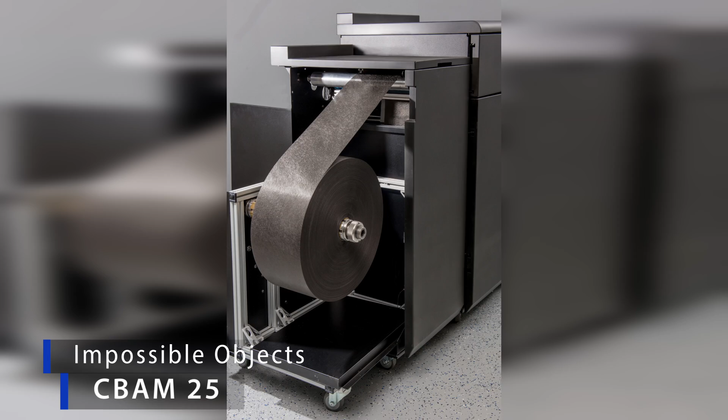Starting with the new composite solution from Impossible Objects. It launched its new CBAM 25 at RAPID TCT, which is an extension of its solutions for composite-based additive manufacturing. Its offerings produce parts manufactured with layers of composite material and polymer in powder form. At the launch, the company stated that CBAM 25 is 15 times faster, not than its predecessor, not than other composite machines, but than all machines in its class. The 25 in the product name stands for 25 feet per minute. That's 25 feet per minute of composite material, 18 inches wide, passing through the machine.

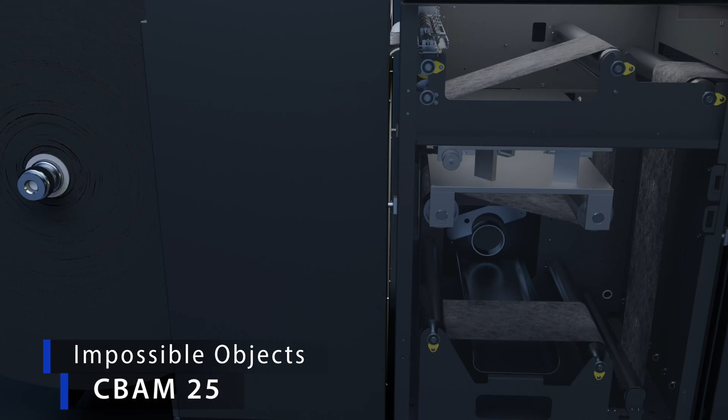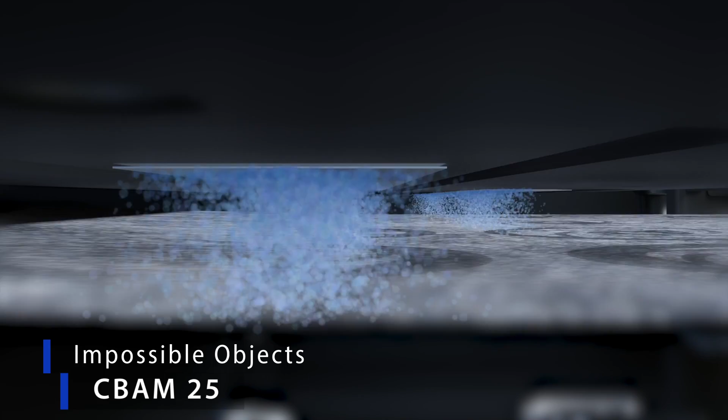That translates to roughly 1 vertical inch in 26 minutes, leading the company to claim that CBAM 25 is the world's fastest 3D printer. How does it achieve that, you might ask? Well, it's using technology developed for high-speed 2D printing, and 2 key elements of that are: it's web fed, a roll of composite material feeds through the machine, and it's also using piezo jetting that's completed in a single pass. CBAM 25 is all about achieving production-oriented throughput, but it has other advantages such as no limit to packing density and room temperature printing, which removes the physics from the processing equation. They're targeting a commercial release in the first half of 2024, but if you're interested today, Impossible Objects is now selling parts.

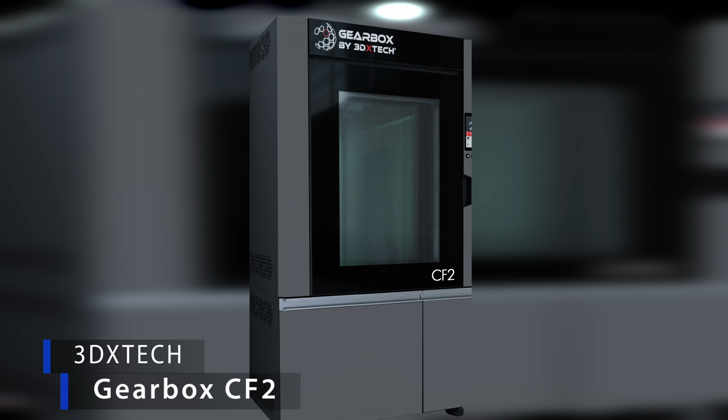Another composite solution came from 3DXTech. It launched its new machine, Gearbox CF2, where the CF stands for carbon fiber. But I was surprised because I walked in thinking this was going to be a more expensive solution. And in actuality, it's their more affordable solution when compared to its high-temperature machine, the Gearbox HT2. It's a 30% price reduction. Gearbox CF2 is a material extrusion or fused filament fabrication machine that runs carbon-filled and glass-filled nylon, as well as many of the company's engineering-grade materials.

It's fully open material-wise, so it can run 3DXTech materials or those from third parties, and it provides access to profiles and archival of those profiles once you've developed the parameter set. It has onboard storage for 8 kilograms of material in a desiccated chamber, and if in the future you want to run high temperature materials, this machine is field upgradable to become a Gearbox HT2. The company is now shipping with only a 2 to 3 week lead time. Now, on to photopolymer solutions.

And I'll start with Nano Dimension, which is known for 3D printed electronics and 3D printed microparts. In the latter category, it announced Fabrica Giga 25VX and Giga 250VX. Both of these machines offer 5 micron layers. The difference between them is the XY resolution and build area. The Giga 25VX offers 8 micron resolution with a 12 by 19 millimeter build area, where the 250VX offers 2 micron resolution with a 6 by 9 millimeter build area.

And like their big brother, the Terra line, which has an even larger build area and higher Z resolution, the Giga line uses a DLP light engine. Currently, the Giga printers are in beta testing.

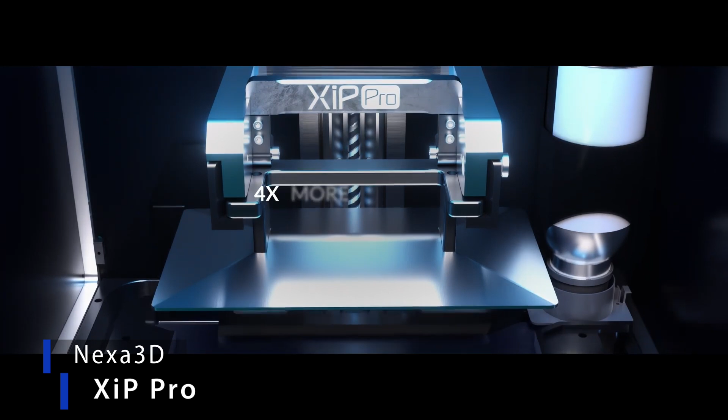Nexa3D rolled out its new XiP Pro at RAPID TCT, and like its predecessors, it uses an LCD panel with LED light engine, and it also uses the company's LSPC, or Lubricant Sublayer Photo Curing process. XiP Pro is a continuation of Nexa3D's theme of industrial printing in a desktop package. And for this printer, it claims the highest throughput and lowest operational cost in its class, with accuracy, with precision, and with surface quality.

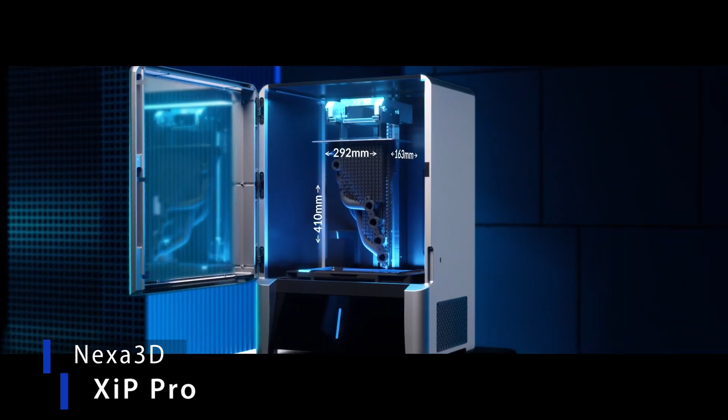XiP Pro has a 19.5 liter build volume, so measurement-wise, that's 292 by 163 by 410 millimeters. And it can print up to 240 millimeters per hour, which means the entire build volume can be completed in under 2 hours when using the thickest layers, 200 microns, which the company states is the same output from 4 of the next fastest industrial 3D printers on the market. Sacrificing a bit of the speed, XiP Pro can print with layers as thin as 25 micron, and it offers a 7K light engine that delivers 46 micron in XY resolution, down to 23 micron subpixel resolution using some anti-aliasing technology. Nexa3D is now shipping the XiP Pro.

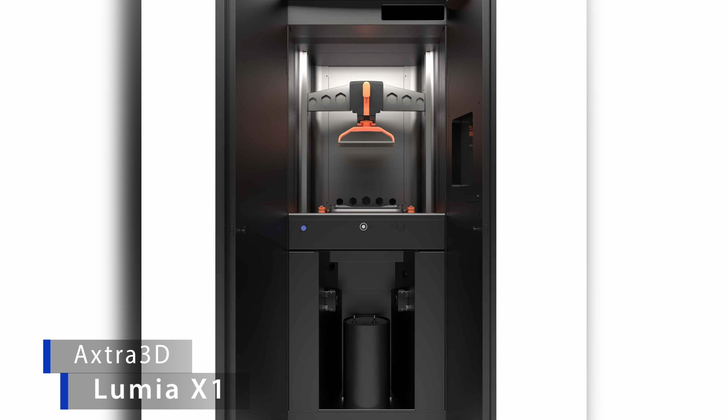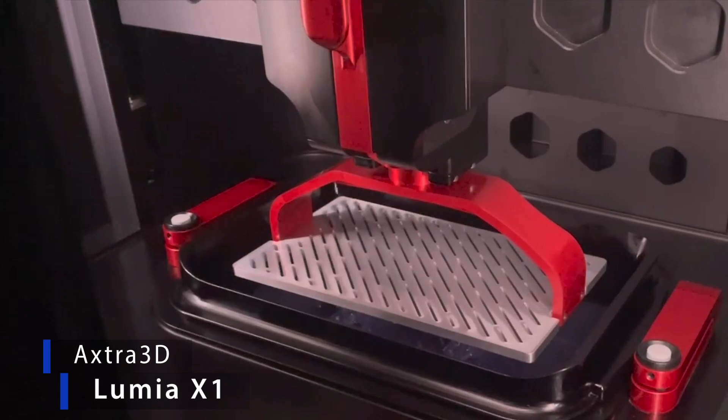A direct competitor to XiP Pro may be Axtra 3D's new Lumia X1, which it states delivers speed with surface finishes that match injection molding surface quality. It achieves this via a hybrid AM approach. For the bulk of the part, it uses DLP. That's then combined with stereolithography to smooth out all the aliased bounding surfaces. And this process is called HPS, which stands for Hybrid Photosynthesis. Axtra 3D states that this offers the best of each process without the inherent trade-offs such as aliasing defects and anisotropism or tiny build volumes.

The Lumia X1 combines HPS with the company's TruLayer technology, which has no limitations to the cross-sectional area being printed. So you can do large, bulky surfaces on this printer. And it has the ability to print highly viscous resins. While it claims print speeds equivalent to other 4K DLP printers, it does not state time per inch, so that'll be up to you to quantify. Build volume is 17.3 liters, which equates to 250 by 140 by 495 millimeters. And it prints in layer thicknesses ranging from 25 to 200 micron.

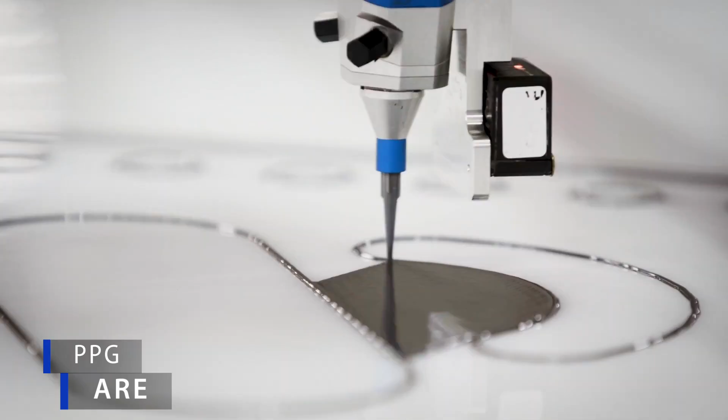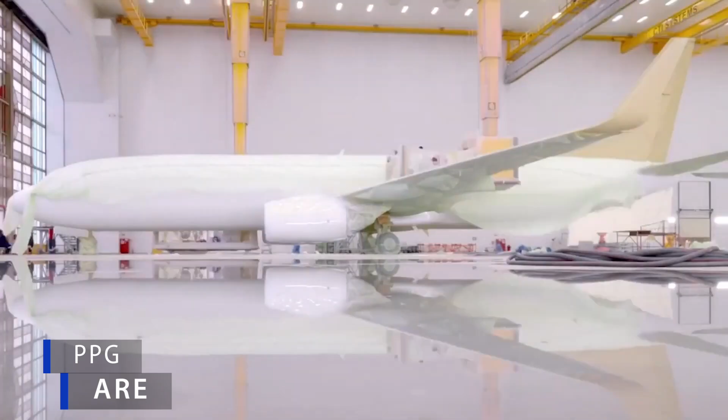Now, surprises abounded on the RAPID TCT show floor. For me, one of them was PPG. I think of this company for coatings. It has a massive reach in that area, so I was just going to skip right by their booth. But a friend told me they had a 3D printer, and that printer uses the company's Ambient Reactive Extrusion Process, or ARE. This uses material extrusion to deposit 2-part thermoset materials. So, they load in component A and component B of the resin system. Those are then blended at the point of extrusion. This opens the door to most materials with 2-part thermoset chemistries, ranging from tough and rigid to soft and flexible. And PPG noted that it has aerospace certified materials available.

Right now, PPG has a strong focus on gaskets and related sealing applications. ARE can do large parts measured in feet in terms of length and width, but height is a bit limited, or very much limited, due to slumping, because it takes time for the 2-part resin to polymerize and solidify. So I was told that the ideal height is up to 2 inches. But please note, PPG is selling parts, not machines.

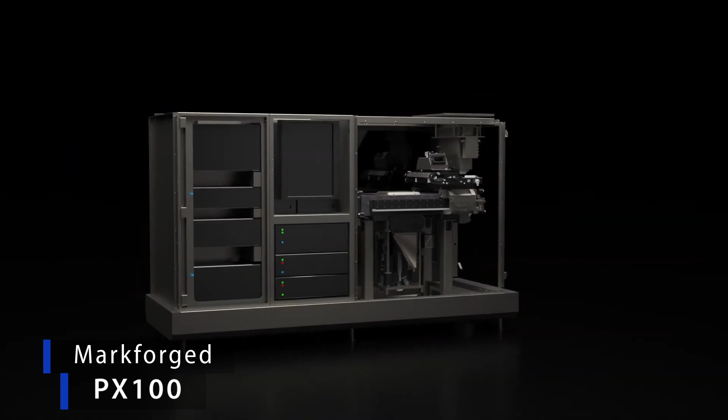Metal additive manufacturing was well represented on the show floor, and I have highlights on 6 solutions, 1 for binder jetting, 1 for laser powder bed fusion, and 4 for directed energy deposition. We got a first look at Markforged's new PX100. This is a metal AM solution based on a binder jetting process. Now, the PX100 isn't entirely new. It's partly a rebranding of Digital Metal's DMP Pro, which was introduced at RAPID TCT 2022. As you may know, Markforged acquired Digital Metal last year. But there's more to the story, more than just rebranding.

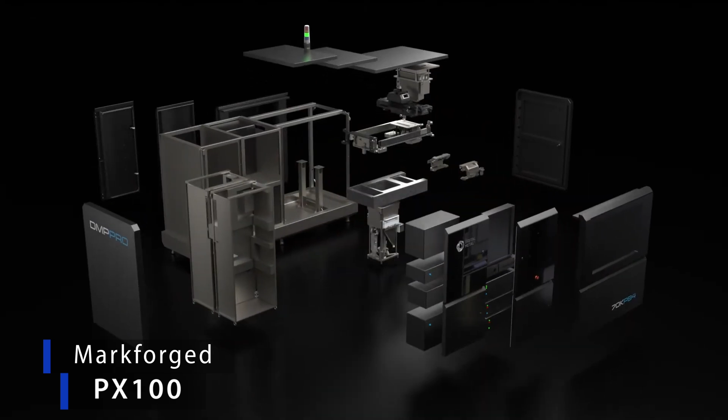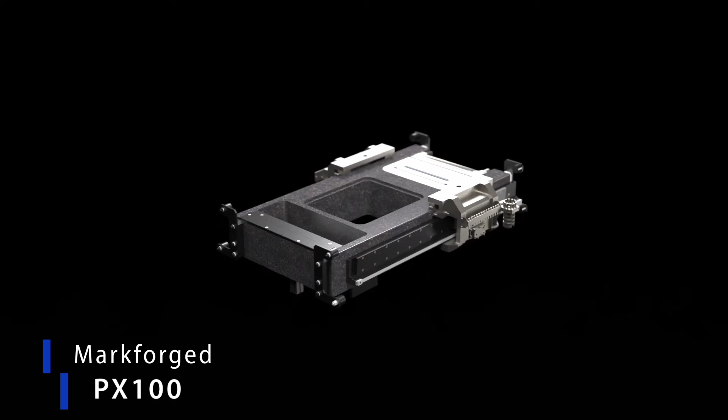PX100 offers twice the print speed of the DMP Pro. It does this with single pass jetting of binder passing through 70,000 nozzles. With the increased speed, higher throughput, and lower cost per part, Markforged believes it has what is needed to really break into production. And speaking of production, PX100 retains the core of the DMP Pro that drives quality, repeatability, and reliability in a 24/7 operation. Items such as granite platform, linear motors, and air bearings.

In the LPBF, laser powder bed fusion category, DMG Mori unveiled its Lasertec 30 SLM US. US is its designation for the machine being designed and manufactured in the United States.

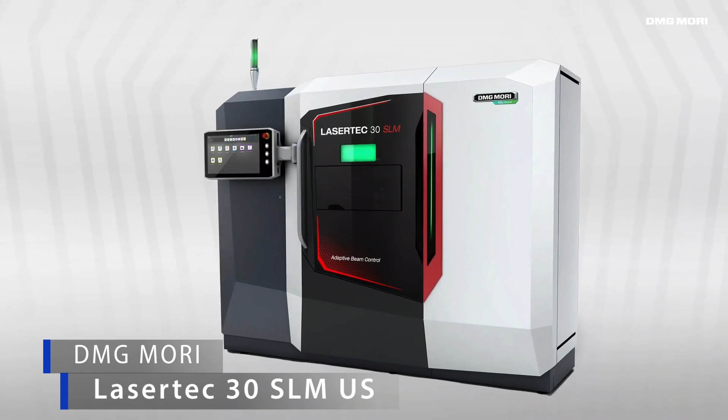Lasertec 30 SLM US incorporates new laser technology called adaptive beam control, which provides dynamic changes to laser power and beam profile, profiles that range from an 80 micron spot to a 240 micron annular ring. Breaking the trend of adding more and more lasers to LPBF machines, this one is outfitted with a single laser with 1.2 kilowatts of energy.

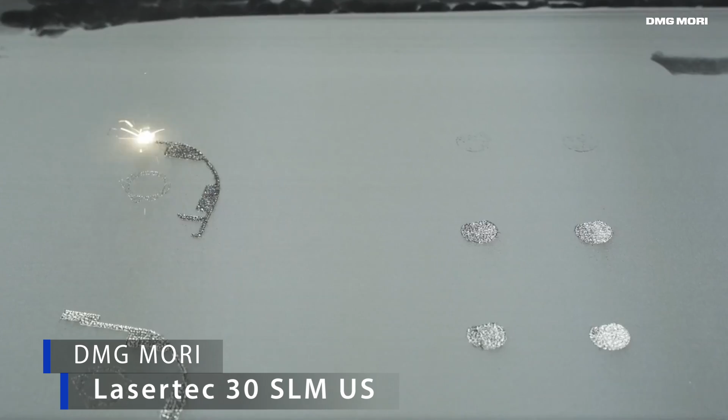Another feature is contactless recoating. Now, when combined with optimized beam control, this single laser system can outperform DMG Mori's 2 laser systems for most print jobs. The bottom line, the company states that this printer offers the best cost-to-productivity ratio, which is total operating cost divided by the output volume.

The Lasertec 30 SLM US has a build volume of 300 by 300 by 300 millimeters, and deliveries will begin in December of 2023. Next, I'm going to cover 2 containerized solutions in the directed energy deposition, or DED category. AddiTec expanded its AMRC-P line with the Performance, name of the machine. AMRC stands for Additive Manufacturing Robotic Cell, and P denotes portable. This is a new, taller option that's also rated for reactive materials.

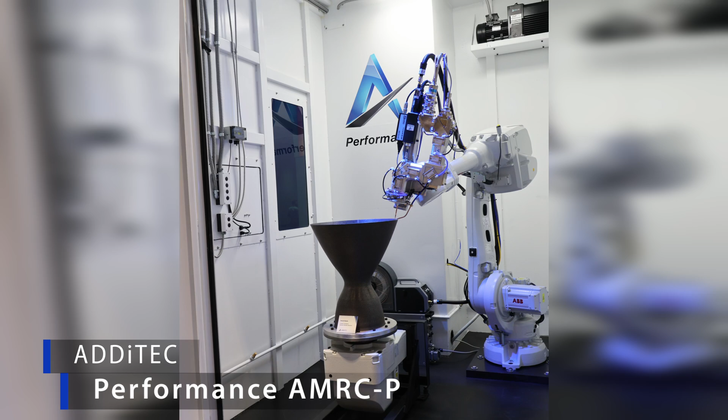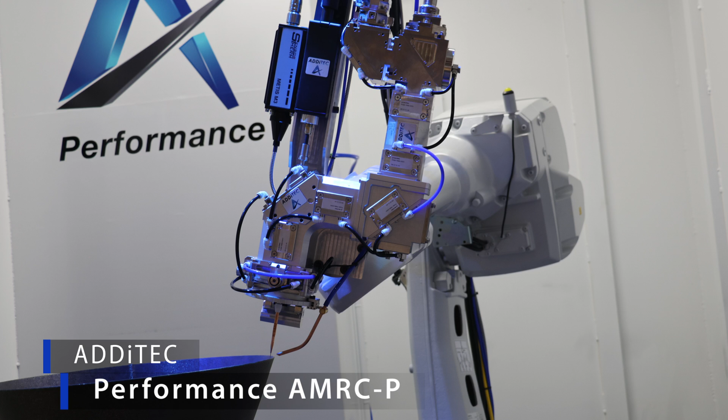Now, the cell itself measures roughly 3 meters tall, with a width and depth of about 2.7 by 2.3 meters, and it can accommodate parts up to 1.8 meters. Performance AMRC-P has a 6 kilowatt laser mounted on an industrial robot, coupled with closed-loop controls. I believe, but did not confirm, that this is both wire and powder-fed. This portable cell is sealed such that it can be filled with inert gas to make parts from reactive materials like titanium. And AddiTec states that the deposition rate for titanium is up to 4 kilograms per hour.

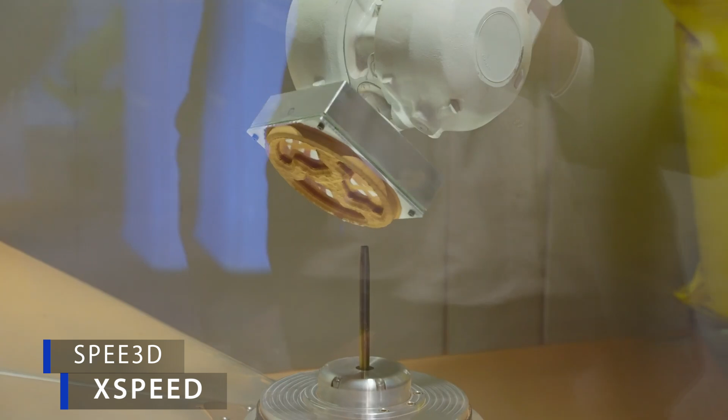Now, announced in November of 2022, SPEE3D showed off its new X-Speed. This is also a containerized solution, but with a military focus. Beyond portability, there isn't a lot in common with AddiTec's solution because SPEE3D uses cold spray, which they call supersonic deposition technology. The X-Speed is transportable as a standard shipping container with the printer and all auxiliary equipment in one box, requiring only a connection to electrical power to be operational.

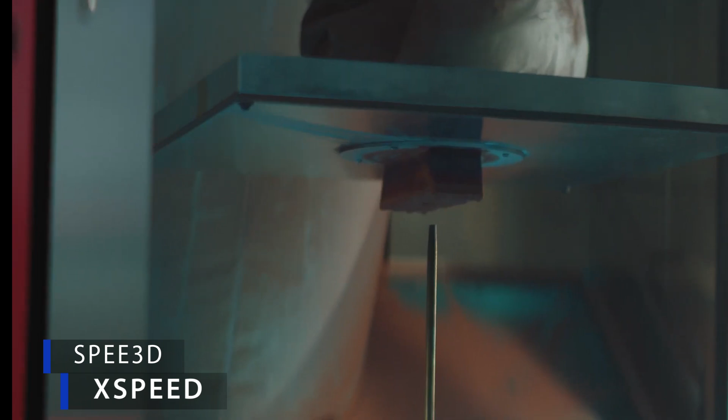With deposition rates up to 100 grams per minute, the company claims that this solution is 1,000 times faster than any other metal AM process. With it, you can print in over 12 alloys, including copper, stainless steel, titanium, high-strength aluminum, and nickel-based carbides. And parts can be up to 1 meter diameter by 0.7 meters tall, weighing up to 40 kilograms. Now, something to note, when printing with reactive materials, inert gases are not required. That's because this process essentially is a solid-state approach. The powder goes from solid to solid in microseconds.

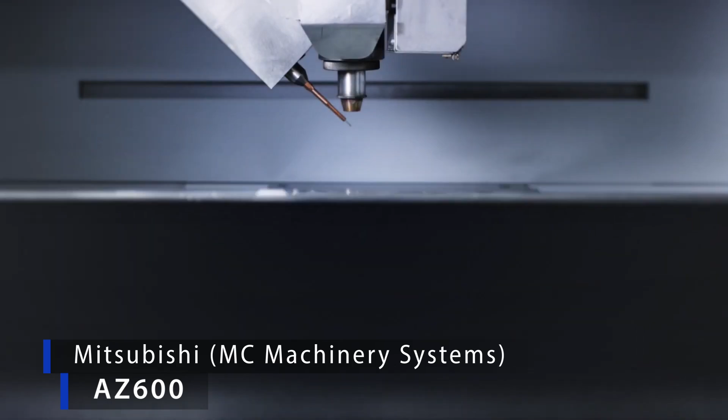Now, I'm going to continue with DED, covering 2 non-containerized solutions from Mitsubishi and Nikon. Announced in September 2022, Mitsubishi showed off its AZ600. This is a wire-fed DED solution, and Mitsubishi proudly stated that it makes everything in the machine down to the resonators, borrowing heavily from its expertise in its EDM and laser cutter product. The AZ600 offers lasers with either 2 or 4 kilowatts of energy, 5-axis motion, and a build volume of 500 by 500 by 500 millimeters. It also has auto detection and compensation for each layer during the build process.

Now, another surprise I stumbled on was at Nikon's booth with its Lasermeister 102A. I went to learn about its integration of SLM products following the acquisition of that company, but discovered that it had its own DED solution for 2 years. Although it's 2 years old, RAPID plus TCT was its first appearance in North America. This DED solution is powder-fed and has 5-axis motion within the chamber, plus an inert processing environment for reactive materials. Lasermeister 102A is a compact unit measuring under a meter in width and depth and 1.75 meters tall. It's targeted primarily for research and education.

I'm now shifting gears, moving into solutions that address the barriers to adoption for production applications that leverage automation, software, AI, and more. And I'm starting with HP and its 4 solution announcements at RAPID plus TCT. Attendees of the event were treated to the first North American showing of HP's new Jet Fusion 5420W and MetalJet S100. These machines were accompanied by product launches for both Multi-Jet Fusion, the polymer line, and the MetalJet lines. For MJF, it was additional automation.

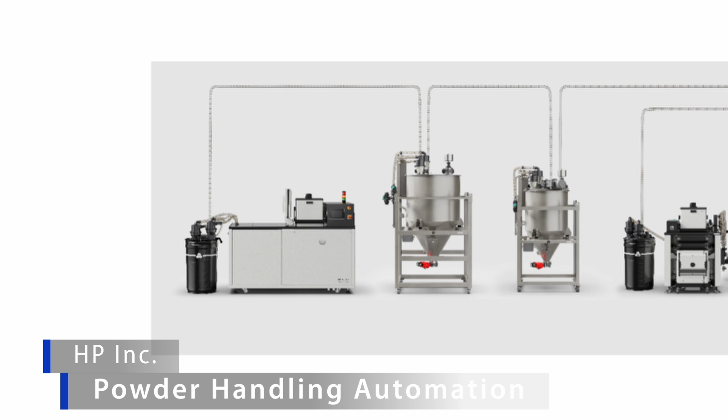Last year at RAPID, HP unveiled automated unpacking for 2023. They've extended the automation to include its powder handling automation solution, which takes the auto unpacking a step further in terms of automation. The powder output of unpacking is now automatically processed through the entire workflow and returned to the printer. The benefits are cost reduction, productivity improvement, and consistency in both quality and traceability. Now note that one of these units can handle up to 15 MJF systems.

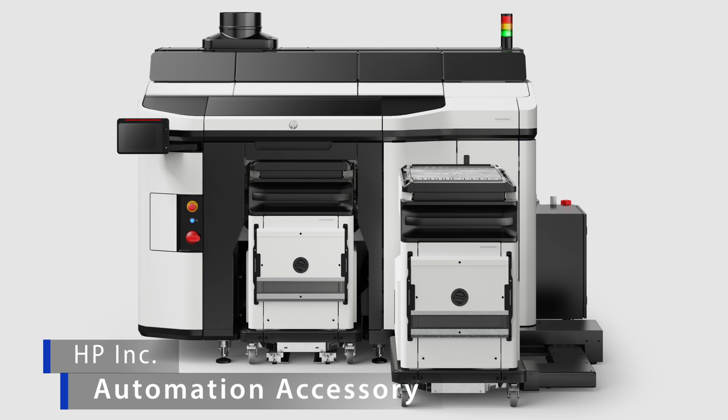And there was the announcement of the automation accessory that auto ejects and inserts build units so that there's no babysitting needed to keep printers running 24/7. With MJF's typical 12-hour cycle time, this option is especially important for those without a night shift. This option is also automation ready for integration to other factory configurations like autonomous mobile robots.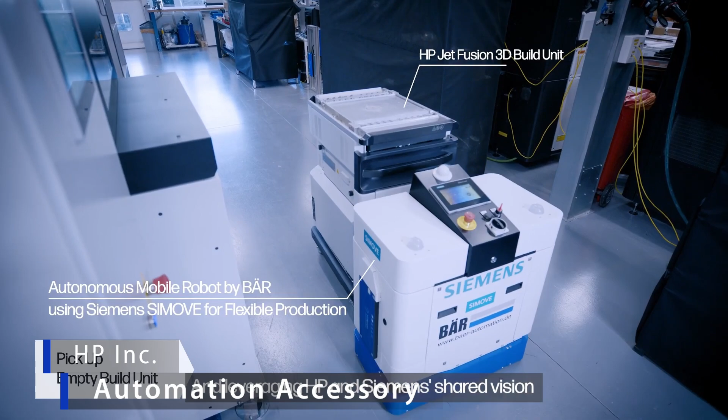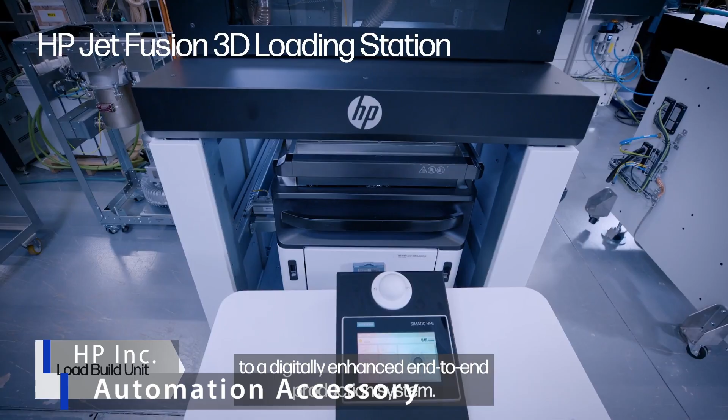At RAPID plus TCT, the company displayed videos of use cases with Siemens in which an autonomous mobile robot is able to retrieve a completed build unit and bring it to different stations within the automated powder handling workflow.

For MetalJet, we had announcements for HP's digital production suite. They revealed 2 components of the suite, 3D process development and digital sintering. 3D process development is for developing and fine-tuning your process recipes. It opens up all the process parameters to users and also provides guided experimentation for process development.

Digital sintering simulates the post-sintering process and then pre-compensates geometry to counter the shrink, drag, and slumping that happens in the sintering furnace. Reportedly, it takes only minutes and can handle large files.

Stratasys demonstrated its new paid version of GrabCAD Print, called GrabCAD Print Pro. It adds features to the base software to reduce cost, print times, and human resources by utilizing automated processes, templates, and cost estimations. The features that caught my attention were warp adaptive modeling.

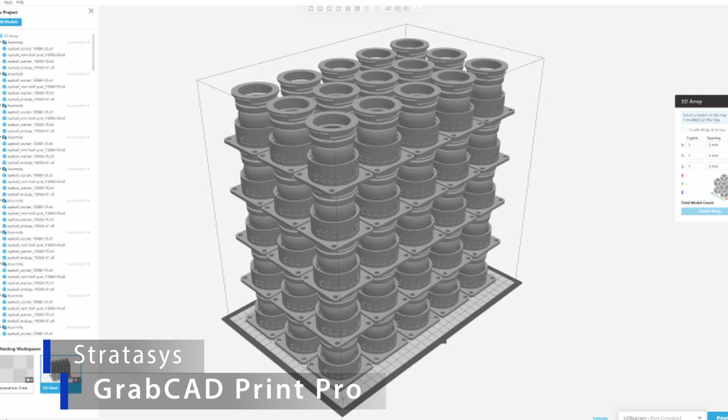This takes scan data from a print and compensates the digital data to counteract the defects in the next print job. They also have stacking parts in FDM and per part estimations, both for time and material. So instead of having an estimation for an entire build, it breaks it all the way down to, in a mixed batch environment, the individual part.

And they announced plugins for third-party applications, highlighting Castor, a decision-making tool, should you or should you not 3D print, and AlphaStar, which offers simulation. GrabCAD Print Pro is now available for FDM and SAF, its powder bed fusion solution. And Stratasys stated that it has plans to add support for PolyJet, P3, which is programmable photopolymerization, and stereolithography.

AON3D is a company that offers high-temp fused filament fabrication machines for processing materials like PEEK and Ultem. At RAPID TCT, it offered a sneak preview of new software that's entering its beta testing phase. It's a simulation engine for material extrusion systems, specifically FFF, fused filament fabrication.

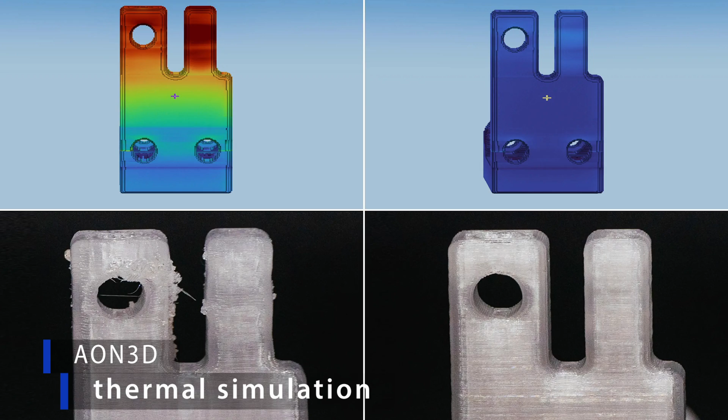It's based on new machine learning-driven thermal optimization that is purpose-built for, not adapted to, material extrusion. It offers fast, accurate predictions on heat flow behavior within parts during printing, with an advantage of doing the analysis and simulation using transient thermals throughout the build process. So this is not a layer-by-layer or whole part simulation approach.

There are a few key benefits of this simulation. One, it simplifies parameter development for new materials, opening the door so that everyone can readily add materials to their portfolio. Two, it considers both geometry and material to provide insights for corrective action before you hit the go button on a print job. And three, it helps you identify inspection requirements, spending resources only where a problem could arise.

The next two solutions are for the respective companies' laser powder bed fusion machines. Xact Metal announced its new software solution, Smart Layer. It partnered with Addiguru to build the foundation of Smart Layer for the company's line of metal printers. Smart Layer is an intelligent monitoring solution. It conducts a layer-by-layer analysis using computer vision algorithms and convolutional neural networks, providing anomaly detection in real time.

Smart Layer identifies typical issues such as part swelling, streaks, hops, and spatter on the print bed and immediately notifies the operator upon issue detection to prevent print failures.

In a similar vein, EOS is detecting problems, but it resolves them without user intervention, and it leverages the algorithm to reduce support structures. The product is called Smart Fusion, and it was announced at RAPID TCT. The software is designed to automatically adjust laser power in real time to minimize the need for support structures while reducing material use, post-processing requirements, and cost per part.

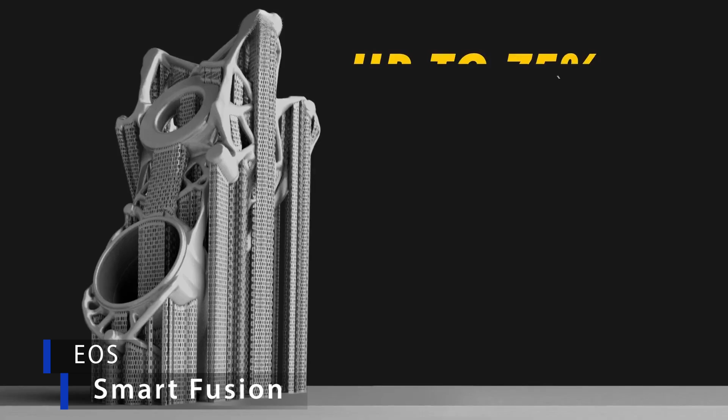It also intuitively detects potential build problems, auto-adjusts the laser power, and eliminates wasted time and resources associated with a trial and error approach. So, how does it do it? Well, it measures the amount of laser power absorbed by the powder bed with a high-resolution camera to monitor each layer's melt pool emissions. That data is then fed back to the laser so the power is adjusted to ensure homogeneous energy distribution across the whole build platform. This then helps to reduce stress in the parts, avoid metal overheating, and avoid movement in undesired directions.

The next piece of news at RAPID TCT is in the MES and workflow software category. It's the announcement of AMFG powered by Dyndrite. AMFG, the company, is leveraging Dyndrite's recently released additive CAM capabilities, which provide for multi-vendor metal AM build preparation so that you can use one tool rather than bouncing between vendor-specific software, and also gain some advanced tools that allow, as Dyndrite says, you to control the laser.

What AMFG is doing with additive CAM is all about automation to address bottlenecks to autonomous manufacturing workflows. Bottlenecks created by the lack of standardization on file formats, build parameters, and protocols amongst the laser powder bed fusion printer manufacturers. This can be a big issue when machines from multiple vendors are involved or parts from different customers are mixed in one build.

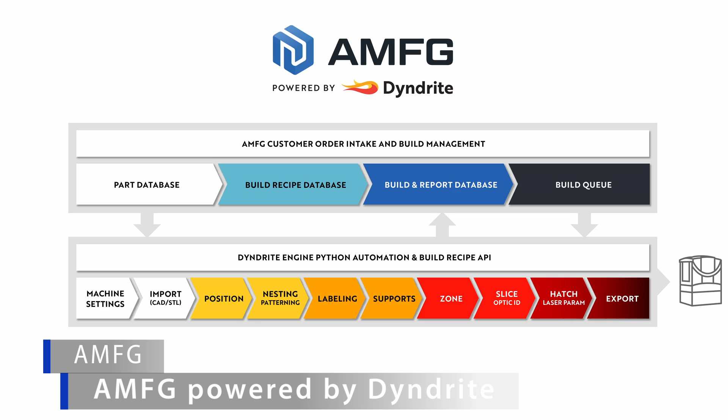So AMFG, powered by Dyndrite, incorporates the latter's additive CAM into the MES workflow with data automation down to the toolpath level. This combined solution enables laser powder bed fusion users to deploy automated ordering, automated collating, and dynamically processed part production services. AMFG, powered by Dyndrite, will be available in the third quarter of 2023.

AM-Flow has been addressing another bottleneck in the additive manufacturing workflow, bottlenecks with high volume and/or high mix outputs, and that's the labor needed to identify parts and where they are in the process workflow. Now, what's not new is the company's backbone of automation. It has, for a number of years, had a solution where you dump in a mixed batch of parts, and its vision system identifies the parts, pulling from MES or similar data sets, and then conveys the parts to the next step in the workflow, all the way out to bagging them for shipping.

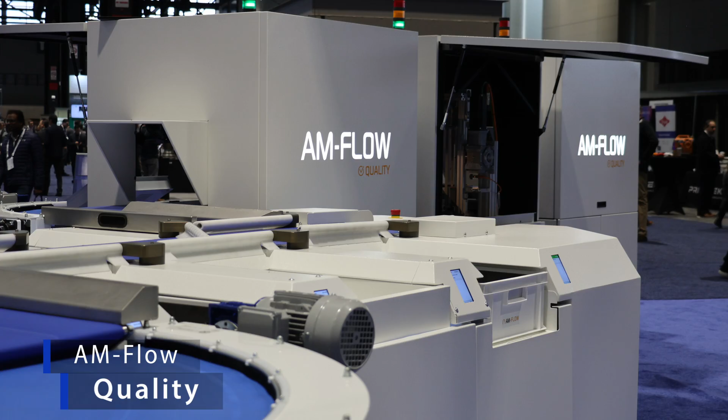At RAPID TCT, it showed off Quality, which is the name for the new tool and its process flow. Quality ties into the workflow solution for inline dimensional inspection. By the way, it's both from the top and bottom of the parts. It receives pass-fail data from the vision step and then sorts based on a pass-fail status. It also generates detailed inspection reports for documentation.

We need digital data to feed additive manufacturing systems, and we're wise to leverage the possibilities presented with design for additive manufacturing. In that vein, I have two new offerings for you. The company formerly known as nTopology, now rebranded as nTop, has rolled out its new nTop 4 software. This is a major release with 4 new feature buckets.

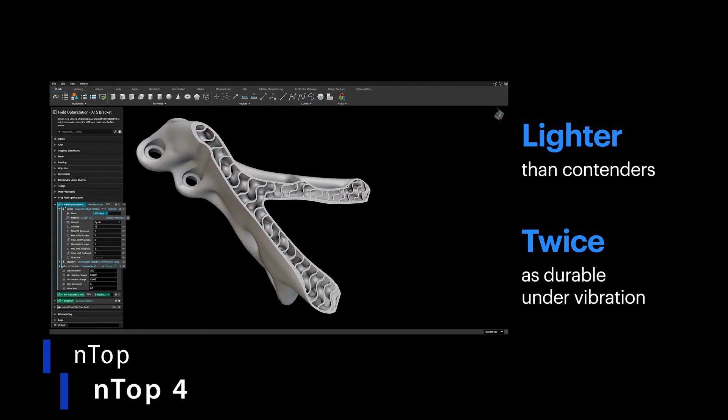The first is field optimization. Essentially, it offers lattice design on steroids. The optimization of every point in space. Both the lattice and the cell are optimized. For example, lattice wall thicknesses can vary throughout a cell or throughout a part. The promise is a tool that decreases R&D and trial and error time to achieve the perfect lattice-based optimization.

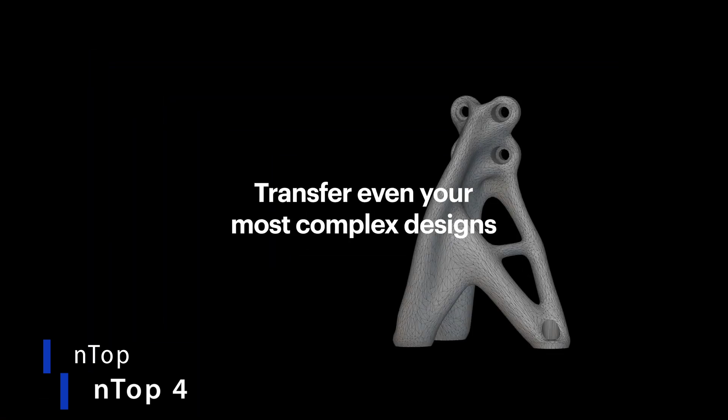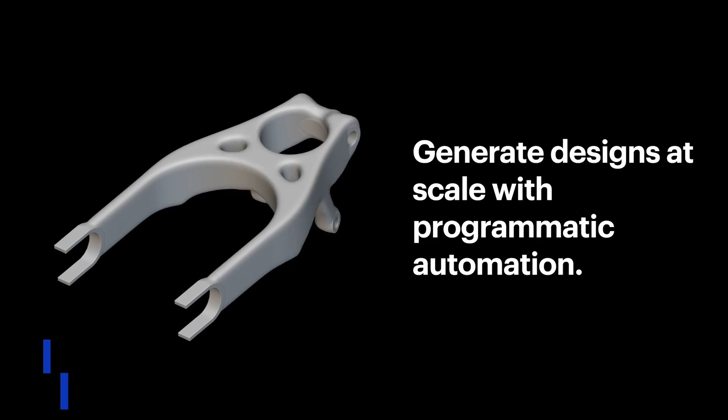The second is implicit interop, which bypasses mesh creation, so you can have direct from the optimization datasets for much smaller sizes. Currently, this capability works only with EOSPRINT. The third item is the developer library, which provides the hooks for others to integrate nTop capabilities into their software. And the fourth is automate, which is all about scripting, avoiding the user interface to make sweeping changes across all selected parts.

General Lattice is the company behind the lattice design for the Wilson Airless basketball, which was seen everywhere at RAPID TCT. It launched Frontier software for lattice creation. This tool is all about making good and appropriate lattice structures for your application without either serious know-how on tuning and refining or cycles of design, print, test, redesign.

It streamlines the process for the average Joe by pulling from an extensive library of geometries, bulk materials, and machines. The company's focus is providing digital material solutions versus just lattices, where digital material is the combination of the lattice design and the material properties.

I'll round out this RAPID TCT recap with quick mentions of 5 new materials that I discovered on the show floor. The first, PolySpectra. It added to its core COR line of photopolymers, which are cyclic olefin resins. The new material is called COR Bio, which you guess is for medical, dental, and bio applications using stereolithography and DLP printers. It combines toughness with heat resistance. On that latter item, it offers the example of being steam autoclavable. Also, it's non-leaching, has low moisture absorption, and low cytotoxicity.

Jabil announced PLA 3110P, which is bringing an entirely new class of PLA to the market. This is based on NatureWorks Ingeo PLA-based powder. Powder for powder bed fusion, not filament for fused filament fabrication, making it the first ever PLA optimized for PBF. The advantages are 89% smaller carbon footprint than PA12 for powder bed fusion and lower cost, all because this is a bio-based material.

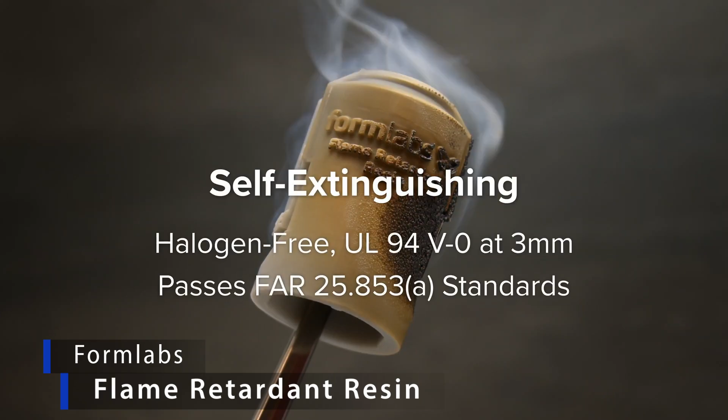And Formlabs announced its flame retardant resin for its SLA printers. It's UL94 V-0 rated. The product name, simply Flame Retardant Resin. Essentium's material announcement went the opposite direction. It's a polycarbonate for low temperature applications. It can withstand minus 60 degrees C temperatures without cracking. They're targeting outdoor use applications like drones and electrical housings. It's not limited for use in its HSE systems. It can be used by any open source FFF 3D printing machine.

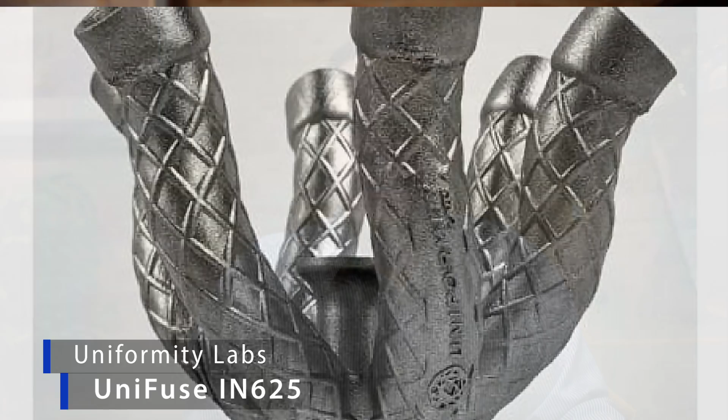And last, Uniformity Labs. It announced the availability of UniFuse IN625 nickel alloy and optimized parameters for laser powder bed fusion printing of that material at 60 micron layer thicknesses. Now note that it can use other laser powers and other scan parameter sets and different layer thicknesses. But with this combination, the company claims that it's achieving 2.1 times faster exposure time and comparable or superior mechanical properties when compared to a competitor's 40 micron layer thickness outputs.

That was just the tip of the iceberg for new solutions revealed and shown at RAPID TCT 2023. I hope this recap aids you a bit in your company's quest to take additive manufacturing to the next level. To stay on top of things, I hope you'll plan on attending RAPID TCT 2024. And remember, plan on bringing a colleague or two to have any chance of seeing it all.